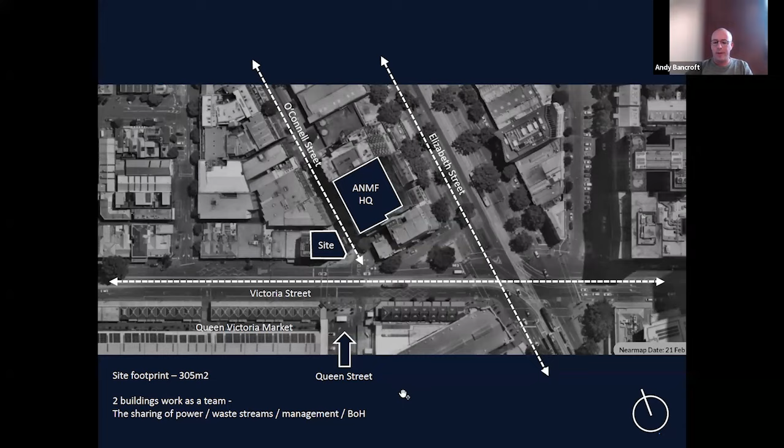So the hotel itself, I mentioned the Passivhaus standard. We targeted the Passivhaus standard because it's really this very comprehensive fabric first design philosophy. So it's all about quality and creating a very efficient thermal envelope. That thermal envelope has much higher levels of thermal insulation than required by the NCC, for example. And then ensuring that that envelope is airtight. So once it's airtight, you can control the internal environment. And that's done with a heat recovery ventilation system. So it's mechanically ventilated, but provides 100% fresh air.

And the 100% fresh air coming in, the air that's extracted, passes through the heat recovery system. So it's about 75% efficiency on the air. In addition to that, we need to consider thermal bridge-free construction, and we'll touch on that a little bit later, and high-performance windows.

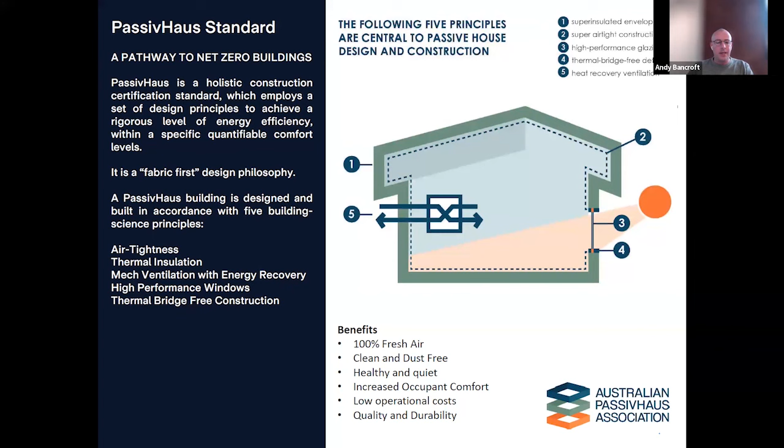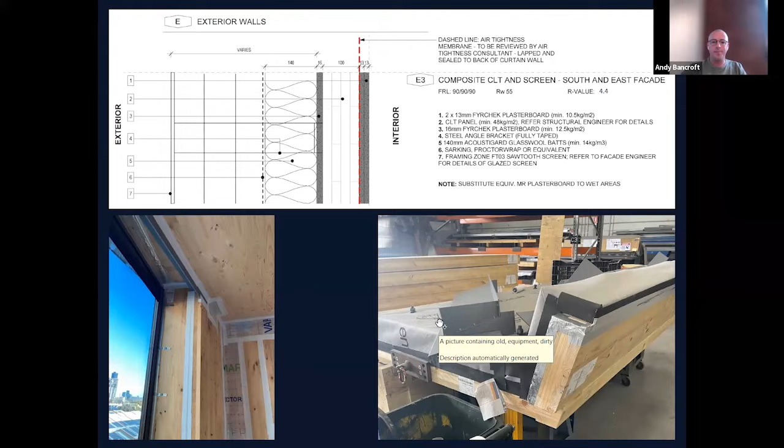So I think we took 3 goes to get there. First go we got to one air change per hour, and everyone was celebrating. Took a lot more to get down to the last bit, and they have a sort of smoke that they use to work out where the leaks are coming from, and then they have to go and track them back and fix them.

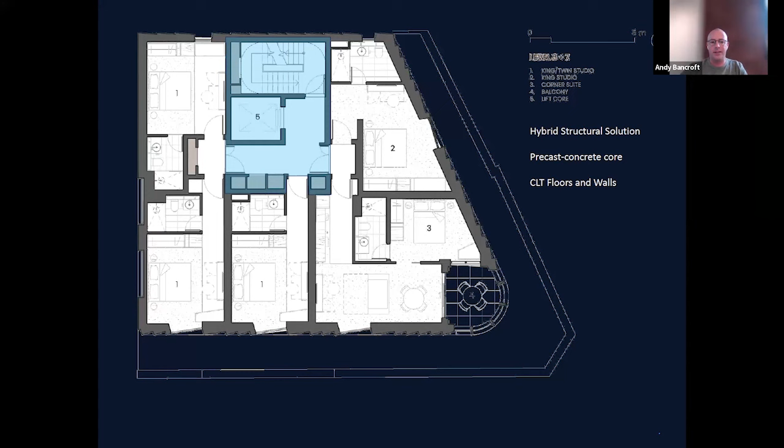So I mentioned cross-laminated timber, or CLT. This is a typical floor plan here. You can see we've got 5 small apartments per floor. And what I wanted to talk about here is this is a hybrid structural solution. So the area in blue that I've highlighted is a precast concrete core. And we needed that structurally for the stiffness because it's a very small footprint and had a tendency to twist. So the precast concrete gives it stiffness. And then around that, we have basically a timber structure.

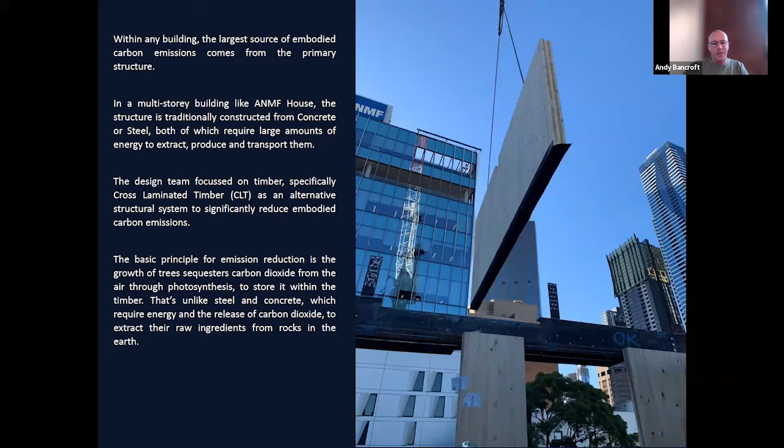So the benefits of using timber as a structure: within a traditional building, concrete or steel primary structure, there's a lot of embodied energy and consequently a lot of embodied carbon in those. So using timber as a primary structural member dramatically reduces your embodied carbon. If you do any more research on that, you'll see that the biggest hit on a project to reduce your embodied carbon is to target the primary structure.

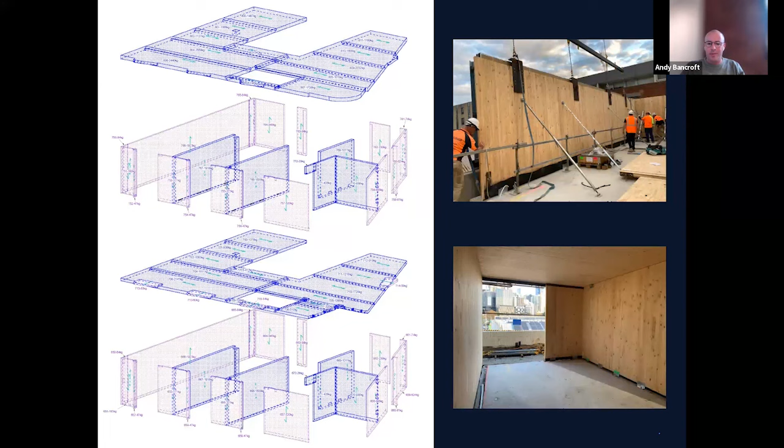I also mentioned this off-site construction. This is because of the timing that we had, we could clad all the panels in a factory. We call them mega panels. The largest is 12 meters, which is limited by the length of the truck. And they come to site and are craned in.

But what that does is it gives us exceptional quality control on the panels in terms of the air tightness and the insulation levels. And it also saves a whole lot of time, mess, noise. There's a huge number of benefits for constructing this way.

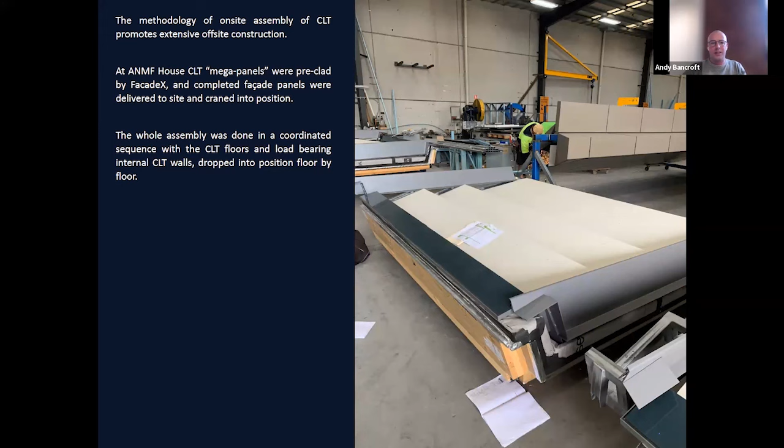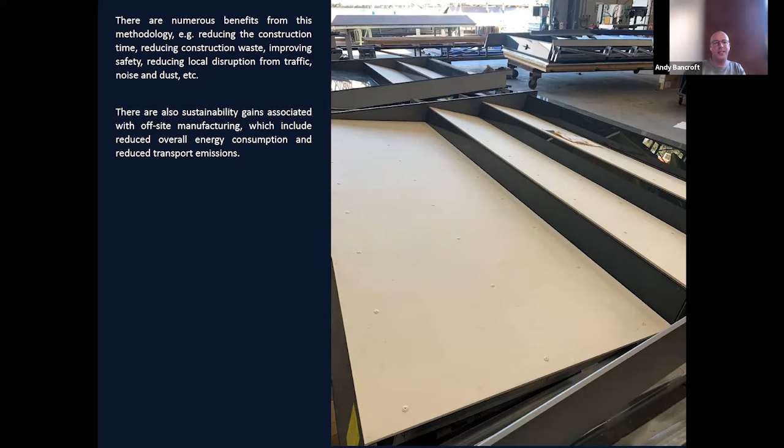Now it is part of a sequence because we are putting in load-bearing walls, load-bearing floors, and facade all at the same time. And the other thing that Multiplex brought to the table was this intelligence about they had to drop the plasterboard for each room on the floor of each room as they put the walls around it because the lift and the stair weren't big enough to move all the plasterboard up and down. So as I just mentioned, we've got these benefits for reducing construction waste, improving safety, many benefits.

They're by a company called Schöck. And effectively, they're just a stainless steel connection rather than an ordinary steel connection. Stainless steel has a much lower conductivity than regular steel. So they put in these stainless steel connections and that creates the thermal break.

On this project, when you look at the facade, you'll see as you come down from the balconies on the typical level, at level 2, we've got fewer apartments and they're larger to accommodate fully accessible rooms. So we've got 2 fully accessible rooms for wheelchairs. Now this corner element pops out a little bit. That meant that the structure coming down from the balconies then has to be transferred out. That was far more complicated than we had understood at the start, but possible.

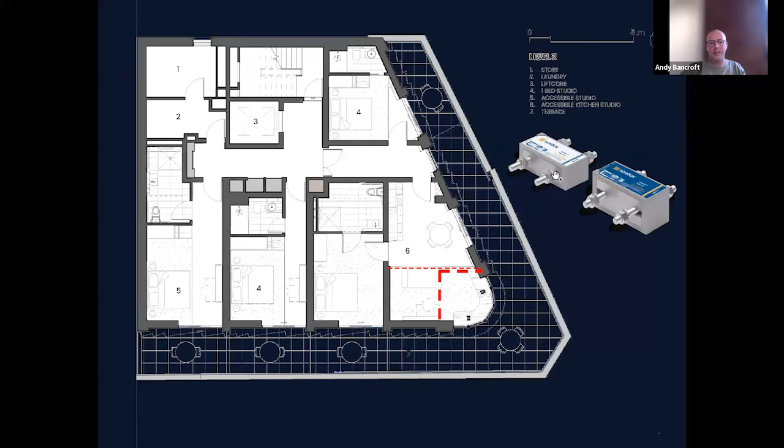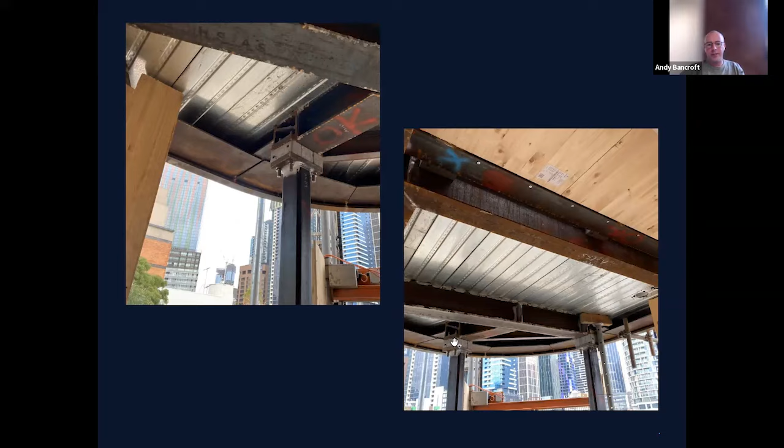These are some on-site photos of those little connections. So those little units that you can see there, this is them between the steel column and the balcony above. So this is in the bay window. I'll show you a picture of it in a second. And this is the thermal break within the structural steel. You can see the 2 of them, one there and one there. This is a detail of that one over there. And then this is the finished product, the corner. So I think for all the extra work that it took to thermally isolate this corner, it was well worth it.

Now I mentioned at the start this idea of nurturing and biophilia. One of the things we worked hard to do with the CLT structure was expose some of that in each room, so you get this timber effect in each room. We had a range of 3 colours, and they went through alternating floors. So there was always a point of difference each time you stayed. But yeah, this idea that it's comforting and nurturing.

Now, in terms of choice of fittings, fixtures, materials, driven a lot by the ANMF themselves. We were very careful to choose locally produced, locally manufactured, or either that or carbon neutral if they were going to be imported. So, for example, we used a vinyl flooring that you can see here. It comes from Northern Europe, but they have a zero carbon footprint production system.

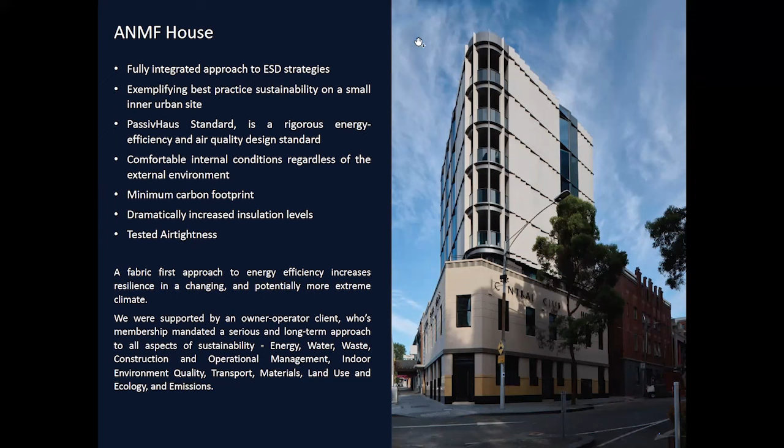Sergio: does the sealed envelope encompass the core? How do you deal with the lift shaft, overrun, etc.? Another good question. So in this building, the heritage facade was considered too hard to achieve Passivhaus standards. So the Passivhaus Institute in Germany exempted those 2 floors, and we have effectively 6 floors above there and a basement that are Passivhaus standard and certified.

So we therefore have 2 floors where the lift shaft and its leaky doors is passing through. Now, when we did the pressure testing, those get sealed off temporarily. There are a couple of other areas that get sealed off. For example, there's a smoke release vent in the lift shaft that gets sealed. There's other elements I can't remember.

Between the basement and ground floor, there's an open stair. We did get some exemptions for the doors at the top of that stair. But typically, it's just about having really good doors, door seals, windows.

We've got another question from Scott. What are some of the weaknesses and challenges of CLT, in your opinion? Good question. So I think in a project like this, where we're doing a hotel with relatively small units, the 1-bedroom unit is relatively small. It works very well. We've got load-bearing walls, relatively small spans.

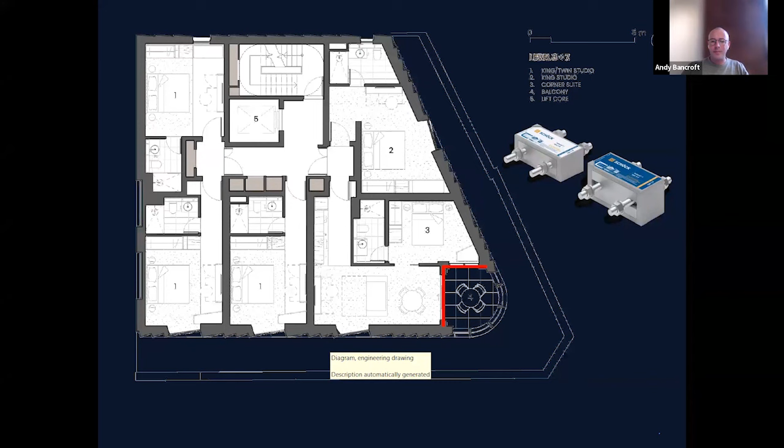I've got a question from Karen. I am based in Tasmania. How common is Passivhaus in Australia in commercial buildings? What factors would prevent it becoming a typical construction? That's a two-part question. So how common is Passivhaus in Australia in commercial buildings? Yep.

Good question. I think, for those of us that live in the southern part of Australia, where our colder temperatures are more extreme, it will become much more common because of the dramatic energy savings. In more benign climates like New South Wales, there's still quite a big growth in Passivhaus, but there's a perception that it's less important. What people maybe don't realize, and I think the biggest area of growth will come when people realize, is that in very hot climates it also works particularly well. So it's a design standard that can work at basically any climate zone of the planet.